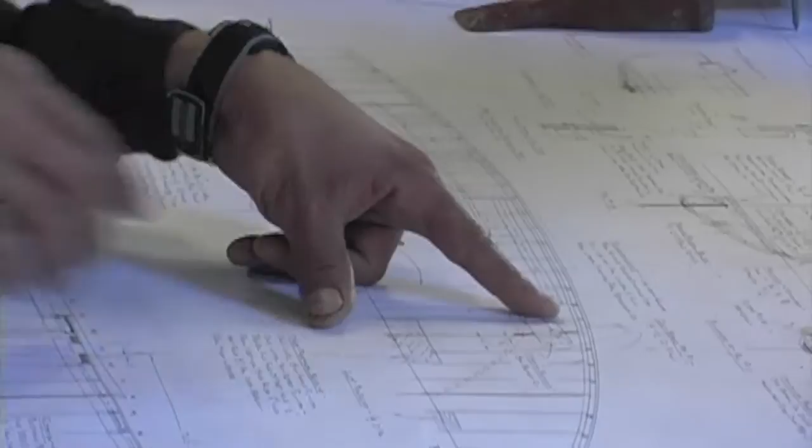I think those two are in. These are deck beams number 8 through 11, 1 1/8 by 1.5 inch Douglas fir. Okay. Deck beam at frame number 29, 1 inch Doug fir for Traveler.

You gotta look sometime.

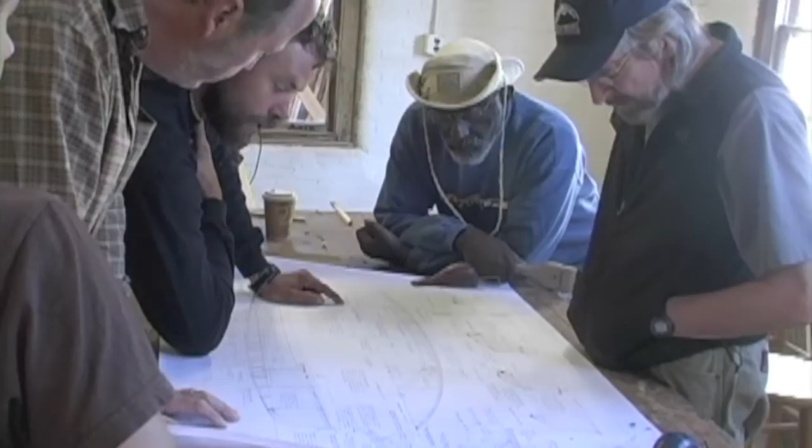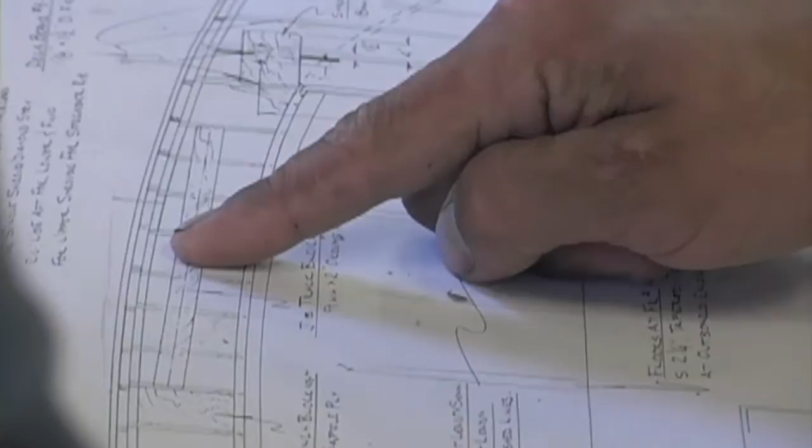And the deck beam at frame 29, these are standard deck beams. Okay? But basically what I'm after here is our next step is to fasten the shear clamp into the boat. How can we fasten that shear clamp into the boat and not be putting fastenings in way of where these beams are going to be checked?

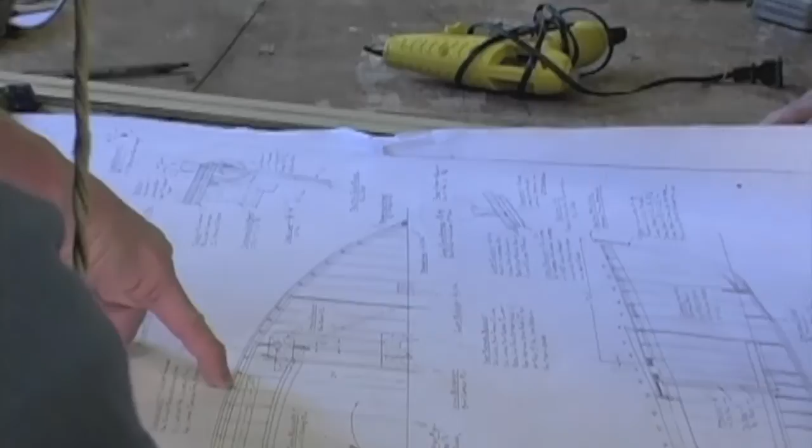I think we ought to go in the middle of the blocking. Every other block that George and Walter fit yesterday will fasten these shear clamps. Are we trying to get the shear clamp fastened surface to surface with these frames? So do we need to grind down this blocking a little bit where it projects proud of the frame?

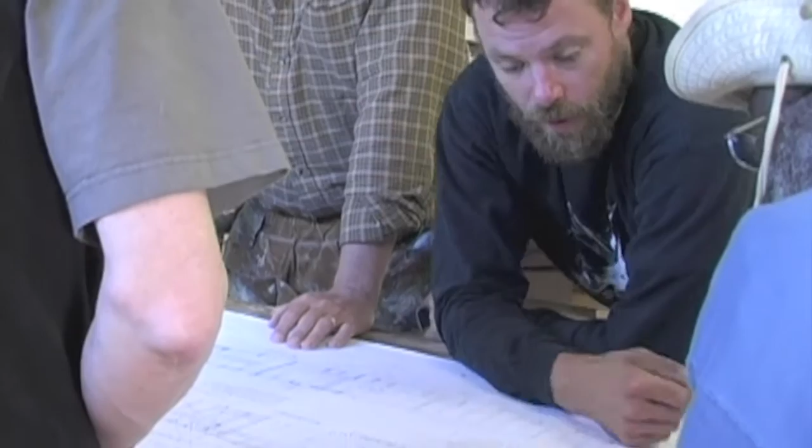We don't need to. Let's have a look. Ideally, yes. That's a lot of work. What little that is there, we're gonna butter up. If we've got some that are obviously a high spot, we'll just shave them off with a block plane. But let's get them in there and have a look.

Some of them may be racked a little bit, and if the blocks are racked, we'll certainly take off a high spot. But if the shear clamps are laying in there pretty nice and fair, are we going to fair down a whole inside fairing surface? I don't think so.

But these are a little heavy. This is the kind of thing I was to here. These are a little heavy to here, so we certainly could take a block plane and kind of shave these down. It's going to be hard here. I would shave as close as you can, and then kind of fair through that with a sanding block and some coarse paper. Okay.

When we go to put the shear clamp into the boat, we're going to use these deck beams that we have to set that shear clamp. And when we start to fair the shear, we're going to want to leave that a little bit proud, aren't we? We're going to want to leave that a little bit proud. So as we put the shear clamp in here, this is all still a little bit proud of our line. Some places it's not, but we're going to fair that up.